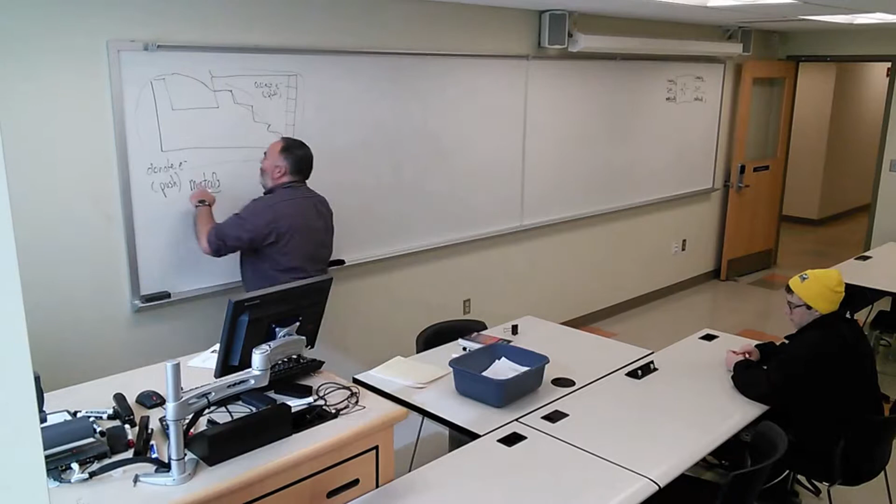That's what happens when these types of materials get an extra electron. First of all, they want to donate their electron to begin with, but when they're given an extra electron, they really want to get rid of it.

So if we take, oh gosh, what's a metal? I think it's right about there. This guy is a common one that we use. Anybody familiar with copper? Yeah, copper wire. Right next to it is zinc and nickel. I don't memorize this, I'm just reading it off the chart. Right below copper is silver, and thankfully they have their names so I don't memorize them. And then gold underneath that.

Those are all metals, and you can make wires out of those things. The way it works is when you have a copper atom next to a copper atom, they don't fall apart. Copper doesn't just shatter into thousands of pieces like glass.

Copper's a thing, and it stays together. The reason is it's so busy giving electrons back and forth. That exchange happens so quickly that if you took a picture of it, you'd see them sort of connected by their exchange. They're pushing, not so hard they're exploding, but it's this network of electrons happening. That's one way to envision what happens.

The way this works is if this is copper with its own electron, this copper with its own electron, and if I were to convince this electron to take this one, it would give that guy, give this guy, and pop up the other side. That's what we call conduction.

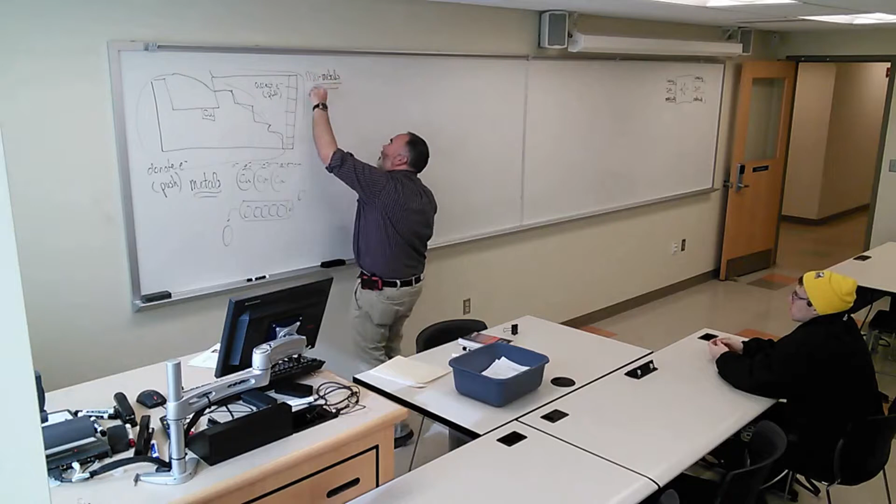These guys are metals. The ones that accept electrons - again, I wasn't around when they named these things, you'd think they'd have a cooler name - they're the ones that aren't metals. They're honestly called non-metals, I don't know why. They could have organized and gotten a better name, I'm thinking. Metals and non-metals, there's not many of them, they're just up in that corner.

One of the non-metals happens to be carbon. Carbon is a big non-metal these days. Hydrogen's goofy, hydrogen is ambivalent - it can behave as a metal or a non-metal. It can lose one electron and become a no-electron ion, or it can gain an electron and look like helium, filling its shell. So it goes either way.

But usually we have compounds of carbon and hydrogen together, called hydrocarbons. Hydrocarbons are us - those are biomolecules, I'm made out of hydrocarbons. My skin, my hair, my fur, my shirt, they're all hydrocarbons. They are non-metals, okay? Non-metals accept electrons.

So when we take two non-metals, let's say a carbon and a hydrogen, and we're going to have the hydrogen act like a non-metal this time - can you play it on again, please? There you go. You already have one electron, but you'd love to have two.

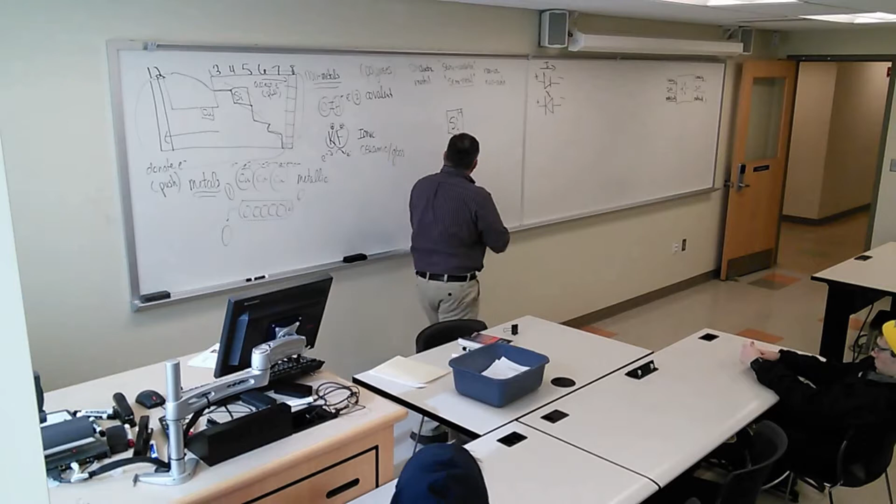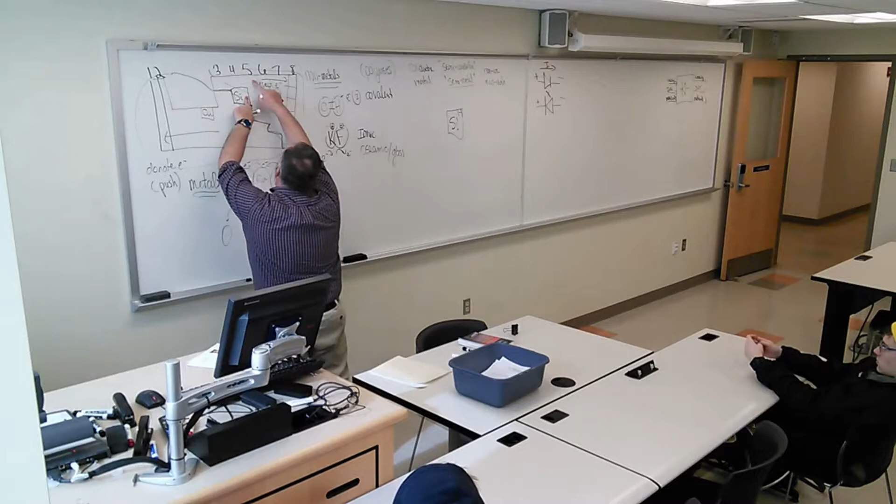So here is our silicon. Okay, silicone is different. Silicone is actually silicon, the element, behaving like a non-metal and being bonded with oxygen. It's actually a polymer, like a silicone rubber. But silicon is the element.

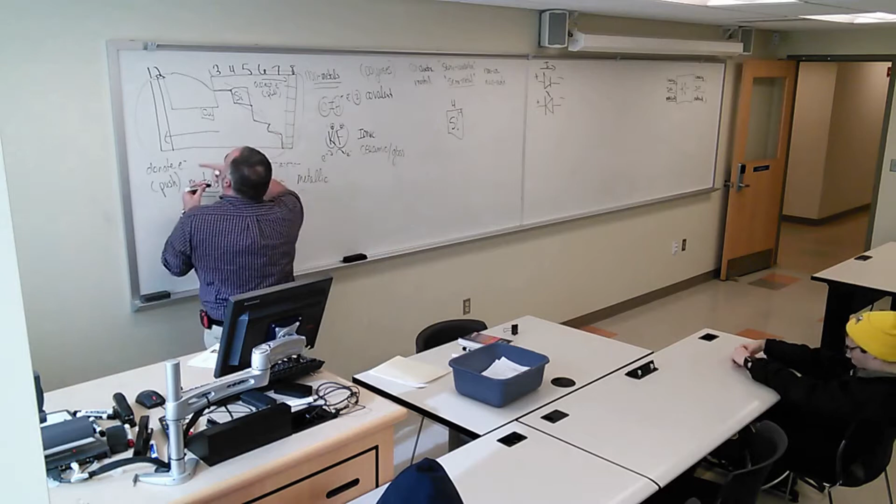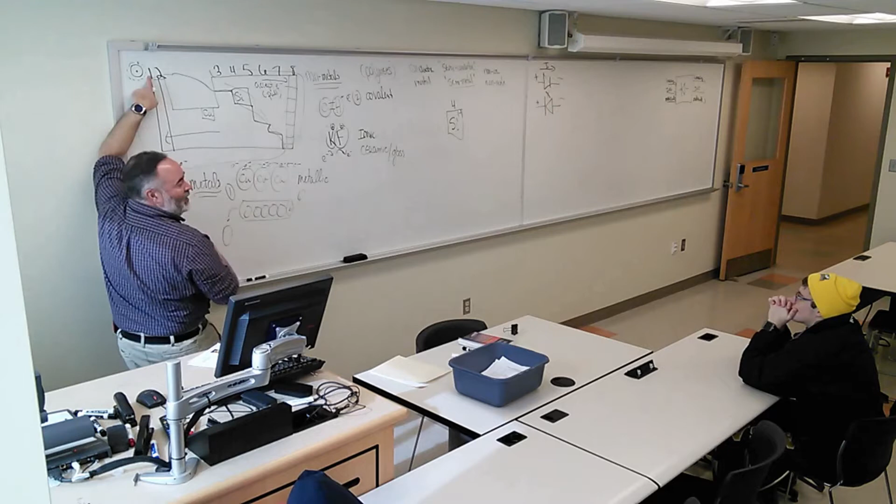We said it was element 14, but it is group 4 on the 4th column. 1, 2, 3, 4. And because we know how these things work in the periodic table, the elements over here have a full shell. This is one model. There's the nucleus, and then there's 1 electron sort of all by itself in its outer shell. That's this guy. This is 2 outer shell electrons. This is 3. This is 4. Silicon has 4 electrons in its outer shell.

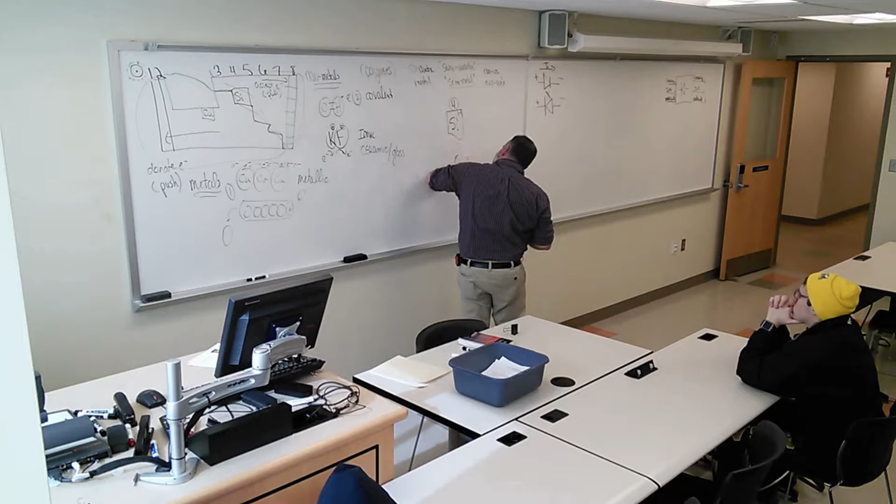Sort of like here's silicon in the nucleus, and then around here in its last shell is 1, 2, 3, 4. Okay, so I mentioned before, the scientists - this is not me making this up - said it'd be great: silicon as itself is an okay conductor. It's a semiconductor, a little bit, or not a bit.

What if we were able to give silicon an extra electron? Of course, it would make it an ion, but then it would have 5 and it would act more like a non-metal. Or what if we were able to take away an electron? Of course, it would be an ion, and only give it 3. It would be more like a metal.

So the engineers and the entrepreneurs and the designers said, hey, wait a minute. If we have an entire collection of silicon, here's silicon, 1 there, and 1 there, and 1 there. I'm going to put 5 of these guys together. Each of these guys have 4 - I'm going to use the number 4 - electrons next to them.

Instead of convincing 1 or several or all of those silicons, let's make them metal first. Instead of taking away an electron from each of them and making this thing a huge positively charged thing, what if we just replace one of these silicons with a different element that only has 3? Again, according to the electrons, it would just see 4, 4, 4. Holy crap, there's only 3 there. Okay, but we'll just change the actual material itself.

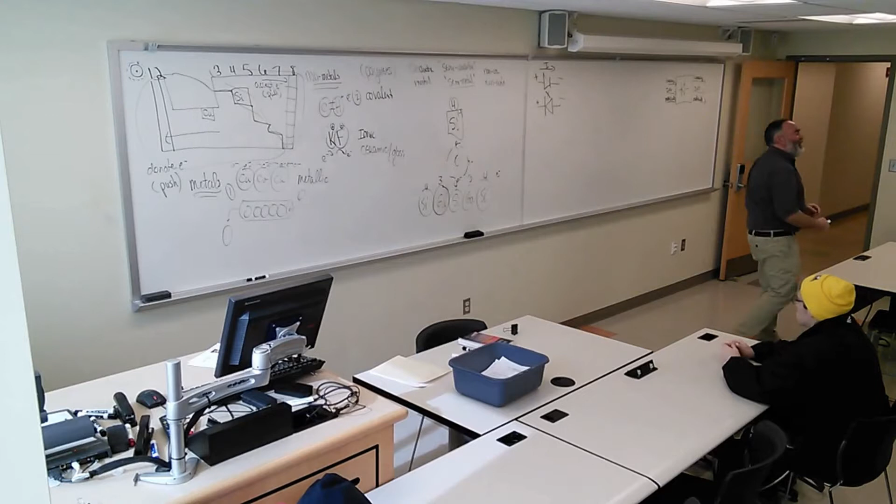But now, according to an electron that's trying to jump, there's now a space where there's a missing electron. It's only 3, so maybe there's room for an extra electron because it sort of acts like the silicon. So what we're doing is making the overall system a little more friendly to electrons, because it looks like they're missing an electron, but we're missing electrons because we've changed the atom, not by stealing one.

Because if we steal one, then it becomes ionized, and all bets are off, because then now it starts repelling back and forth. This is still neutral.

So we're going to put a small percentage of gallium, or another one, indium, in with the silicon while it's molten. Literally like making chocolate chip cookies. We're going to make it homogeneous, and then let it freeze. When we're done, we're going to get this crystal, this block of silicon gallium semiconductor.

I didn't make this up. It's called doping. There was a famous bicyclist,

Lance Armstrong. Did he get in trouble for doping? Yeah. So what do we use the word doping for? Like he took extra chemicals to make himself better? Yeah, that's where this comes from, this doping.

Again, this predates Lance Armstrong. The scientists doped the silicon with extra chemicals, with gallium, to make it more metallic, to have it have less electrons. This is gallium-doped silicon semiconductor.

Sure, that's not on the test. I'm not going to ask you this stuff. I just want you guys to realize where it's there. And we're going to constantly, through all 4 years of being an institute major, look at cool inventions and innovations like, wow, that sort of makes sense.

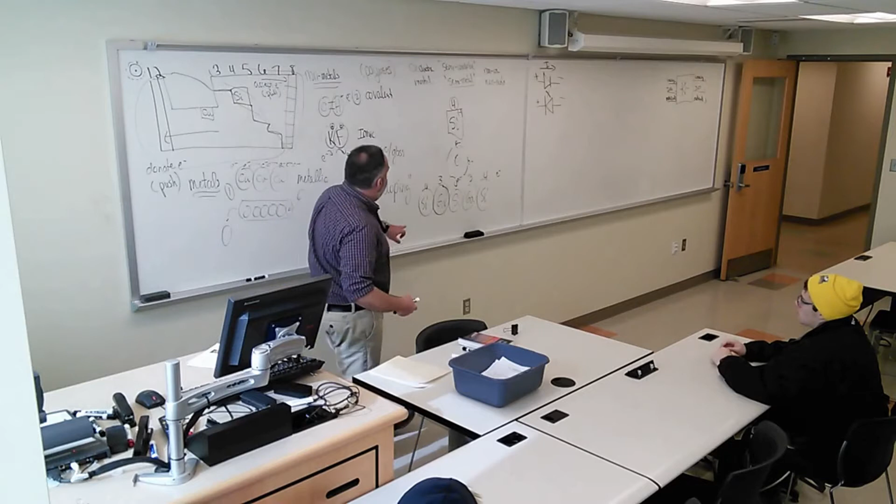And when you're done, we now have this entire industry called the semiconductor industry. That's how all of our cell phones work. Based on that: if it works for doping with gallium to make this less, then maybe it will work to dope with another material and make more electrons.

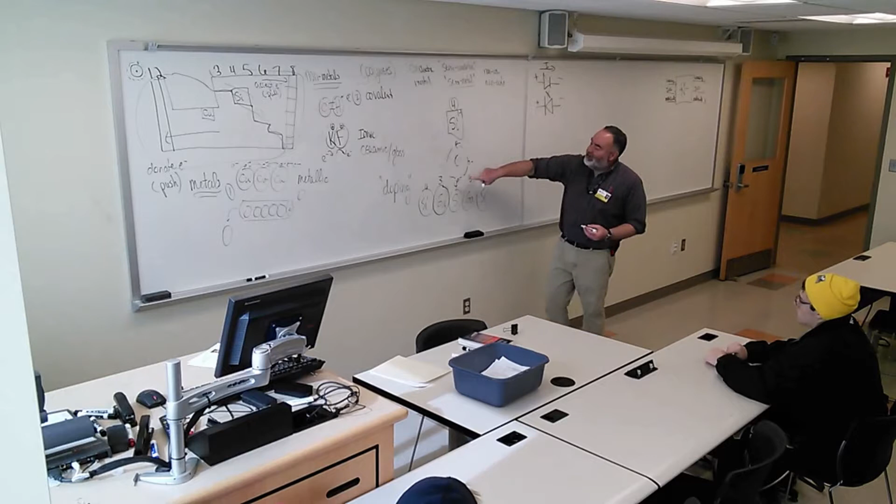Okay, so this guy's missing electrons. So if it were actually missing it, it would be positive. So they call this guy p-type, because it's positive type. It's missing electrons. It behaves more metallic, like a metal, because it's missing electrons.

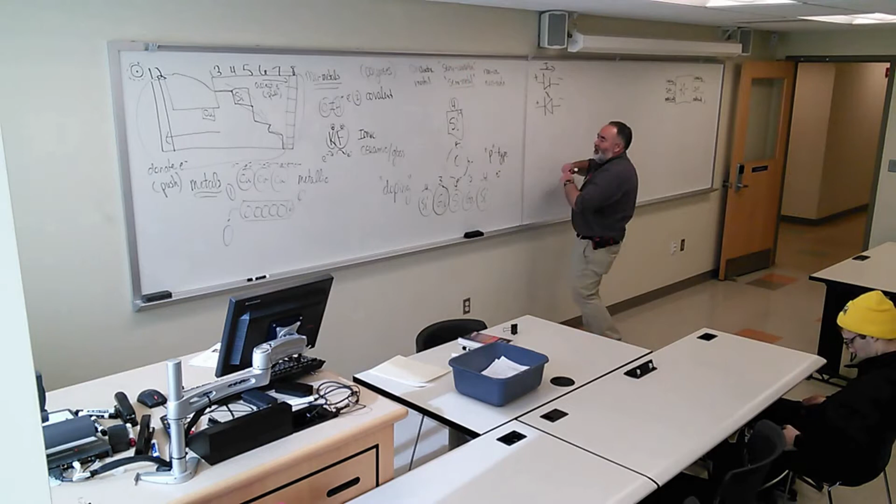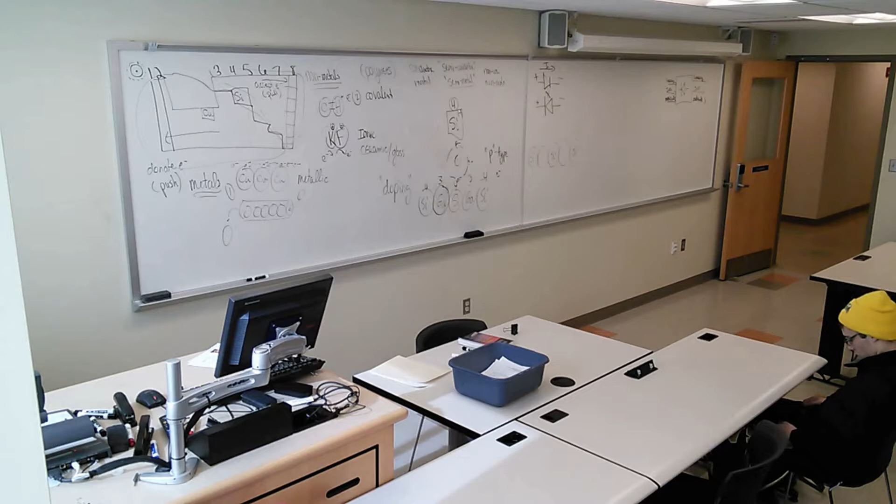We're getting back to this guy in a second. Let's do this again: silicon, missing, silicon, missing, silicon. Let's dope the silicon with a different semiconductor that has 5 electrons. Let's give it an extra electron, make it more non-metal, make it more of an insulator without actually making it an ion. So we used gallium and indium before. How about arsenic and antimony?

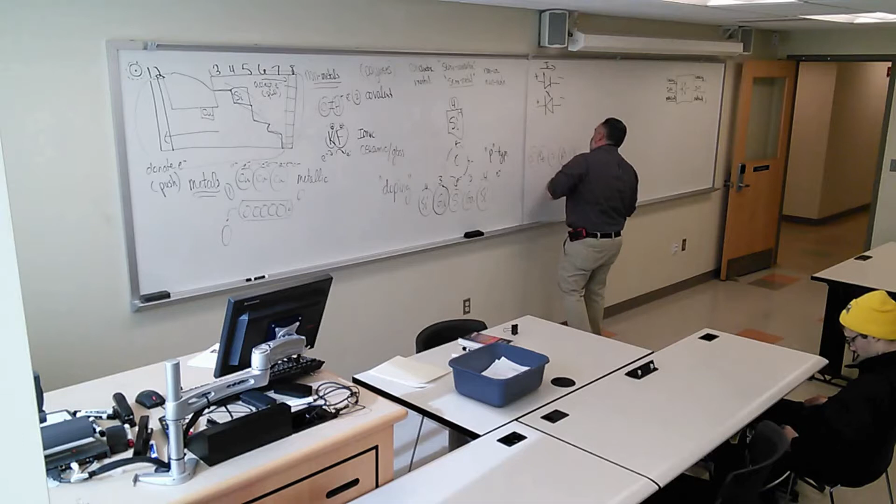As and Sb. Let's use arsenic. Arsenic's a popular semiconductor. Has anybody had arsenic for lunch recently? Anybody know a fun fact about arsenic?

It's really poisonous. Yeah, so when people hear that you're using a laptop, it really does have atoms of arsenic, and they're inside these crystals of semiconductors. Even if you lick the chips, you're not going to eat it. But if someone were to literally take arsenic, the metal, and put shavings into your lunch, Agatha Christie made millions of dollars by people getting poisoned by arsenic. It's a very popular poison. So don't do that. Don't eat arsenic.

Yeah, so now in 2016, the number one way of killing people was like stabbing them with an icicle so that it melts. That's popular. If you watch CSI, yeah, that's a popular way to go. Arsenic, for whatever, in the 40s, 50s, arsenic was the way to go. It was like the popular way to be.

Anyway, so if you're working for a semiconductor company, and this is called P-type, what are we going to call this guy? Of course we are. I can spell it. This is a 4, this is a 5, this is a 4, this is a 5, this is a 4. Now we have extra electrons. It's going to be more negative, if you will. It has extra electrons, and we're going to call it N-type.

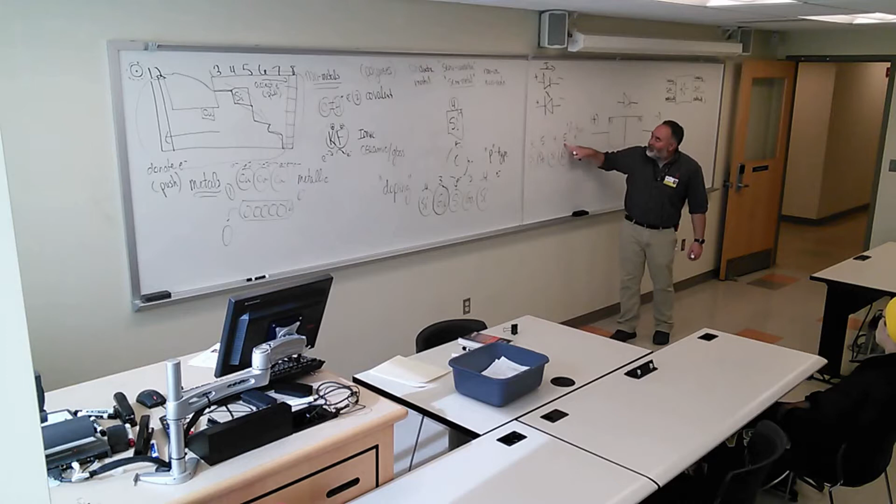Remember, the N type has extra electrons, if you will. So the way I'm going to draw this is I'm going to draw those extra electrons. I'm going to use the marker that works. I'm going to draw just the extra electrons, and not all this other jazz. You can envision in your mind's eye, there's silicons and there's arsenics, but I'm just going to draw the extra electrons, okay?

On this side, here's the P. We're missing electrons. And because I had eggs for breakfast, I'm going to draw this as an empty egg crate. There's parking spaces, there's slots full of electrons, but they're missing. But there's room for the electrons to go, okay?

So the P-type has extra places for electrons. It's missing them. They could fit some extra electrons if they had any. And over here, these guys have extra electrons. Okay? Here's our negative. Here's our positive.

I keep on mentioning and ask you guys to think about current as going from positive to negative, because it makes sense, I guess, for things to fall down. But as physicists, we know that's not true. That's a made-up story. There is no positive charge. It's not protonics. There actually is an area of research called protonics.

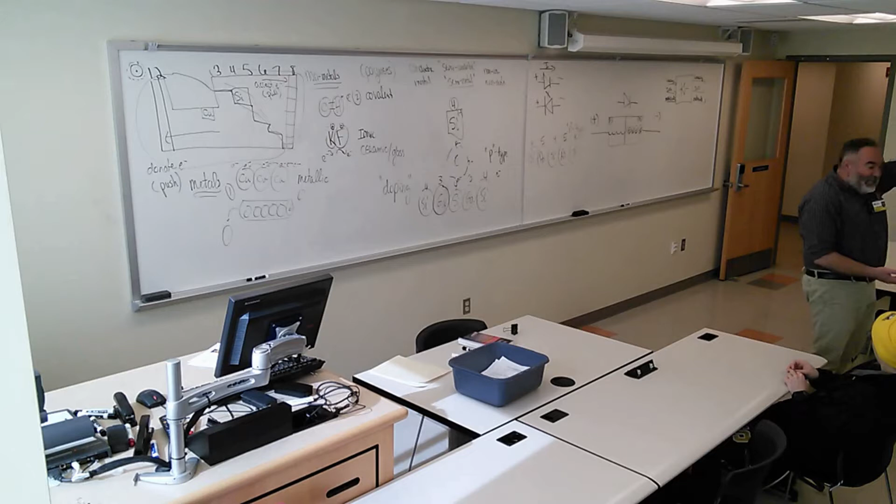We're talking about electronics. We're talking about electrons flowing. So all that stuff about current flowing from positive to negative, that's still true, but let's put that fake story on hold. Let's think about the actual electrons. This is what we're talking about, right?

The negative pole of our power supply is negative because it has a whole bunch of high pressure electrons, high voltage electrons. Positive is missing electrons. Okay, it doesn't have enough electrons, which makes it positive.

So we put this diode in the circuit. We turn it on, and all of a sudden we have this huge push of electrons. This is a cartoon. What happens? This electron gets shoved into that end of the diode, just like a wire. What happens to the rest of these electrons when we shove an extra electron in here?

Same thing with the wire. Bump, ba-dum, ba-dum, ba-dum, ba-dum. Oh, look, there's a nice space for an extra electron. And then we just keep on shoving. Dun, dun, dun, dun, dun, over to here, over to here, over to here.

After this fills up, okay, out comes like, oh, wow, fantastic. It conducts just like a wire. So this is a diode picture.

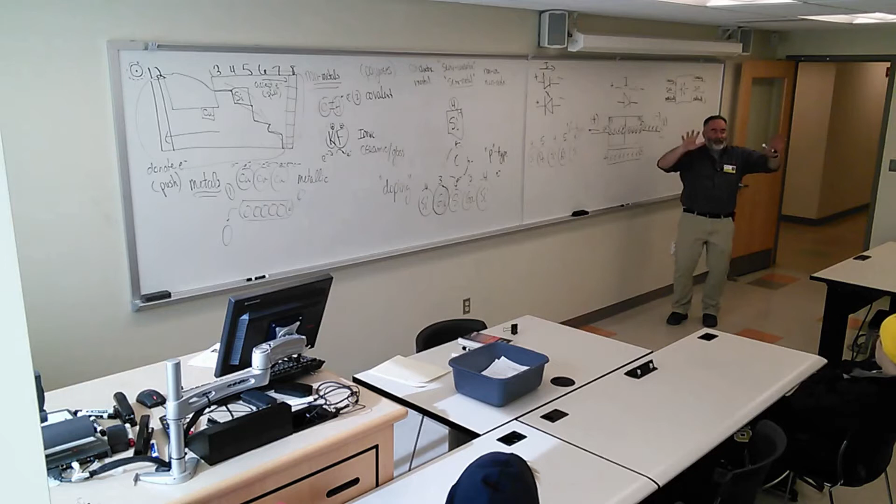So when this material is in this orientation and we turn on the voltage, there's some time. The time is almost instantaneous. The rest of the material fills up and then it flows. And then once the diode is happy, once the circuit has settled down, this just flows current all day.

From the right to the left. In this picture, we're looking at the flow of electrons, not the flow of positive current I. So even though we're sort of visualizing in our mind's eye the electrons going from negative to positive because they're falling up, this is what we mean, the current flows.

If they're flowing up, it comes back down. It's confusing as hell. I'd rather just, as a physicist, stay with electrons and say, guys, it's electronics, get over it. But everybody likes to see things fall down. Okay? So, great, what a fantastic way to think about this.

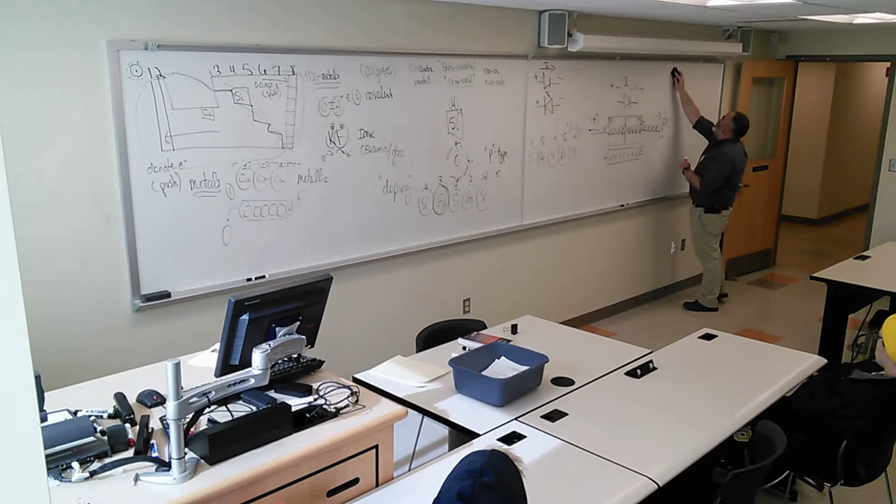What if we switch this guy around? Wouldn't work.

Diode. Let's put the P over here. Let's put the N over here. Here's negative. Here's positive. This is a push.

Oh. Bunch of electrons.

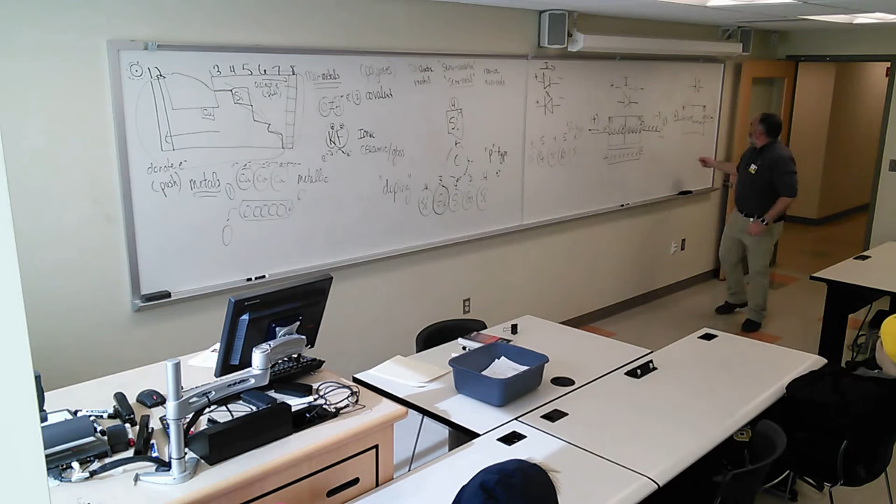We turn it on, okay? When this guy's this way, it's going backwards. When we turn it on, these electrons, yes it's true these guys, there's a parking space if you will, and there's a space over here, but this movement from there into there doesn't happen by virtue of how they've adjusted the formula. Because for this guy to jump into there, this extra parking space, this guy would have to get an extra electron. It would have to be ionized.

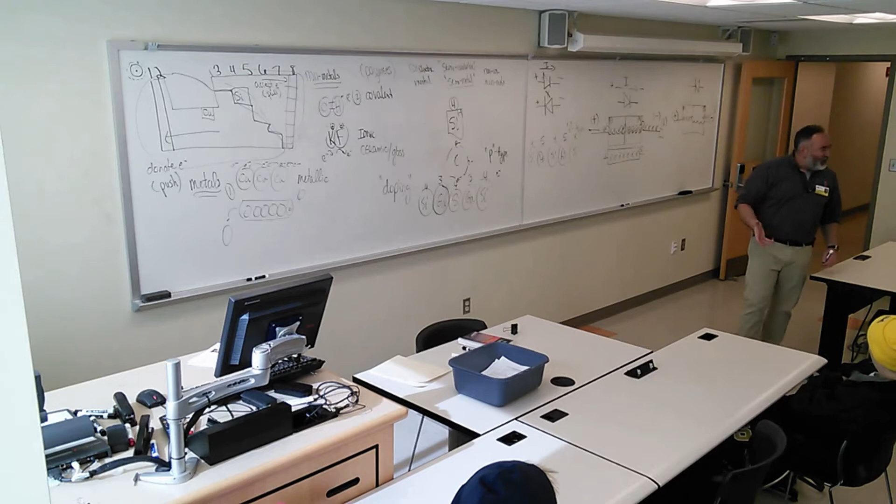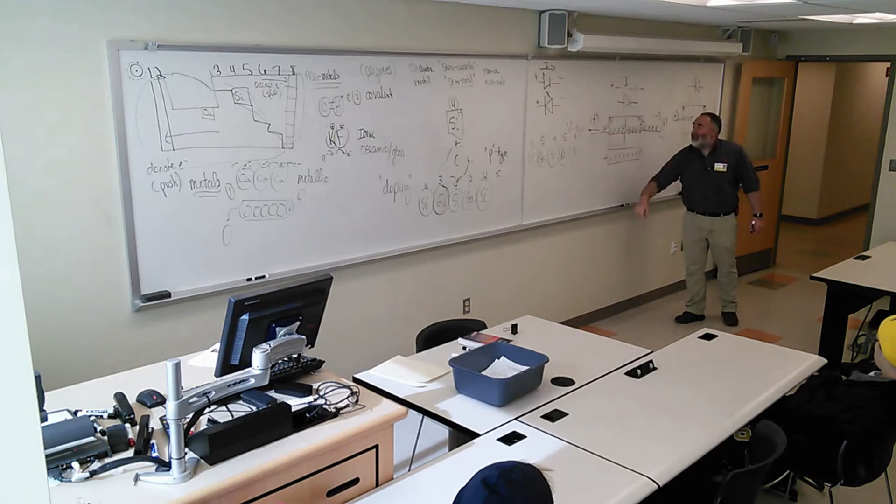We're not talking about giving it an extra negative charge, we're just talking about these guys shifting their electrons that are over here. They've adjusted it. Inside the material, this does happen where it fills the empty spaces, but this guy is designed so electrons from the outside won't fill it up. So it's as if one picture I have in my mind is this bridge, this chasm. Here's the electrons, there's nothing to get the electrons across, they're just a gap. It's as if the circuit is open, like the drawbridge and the closed drawbridge. No current flows.

Here's the current, positive, negative. Here's this guy. No current flows this way because no electrons flow that way. So the diode does not allow things to flow in this direction. You could physically pick it up and turn it around and it will flow. What normally happens inside a circuit is we change the direction of positive and negative, and when we flip the positive and negative, then it flows the opposite direction.

We have 2 more minutes. There's one more explanation. Again, this is just cartoons, so we're not solving actual physics equations and math equations.

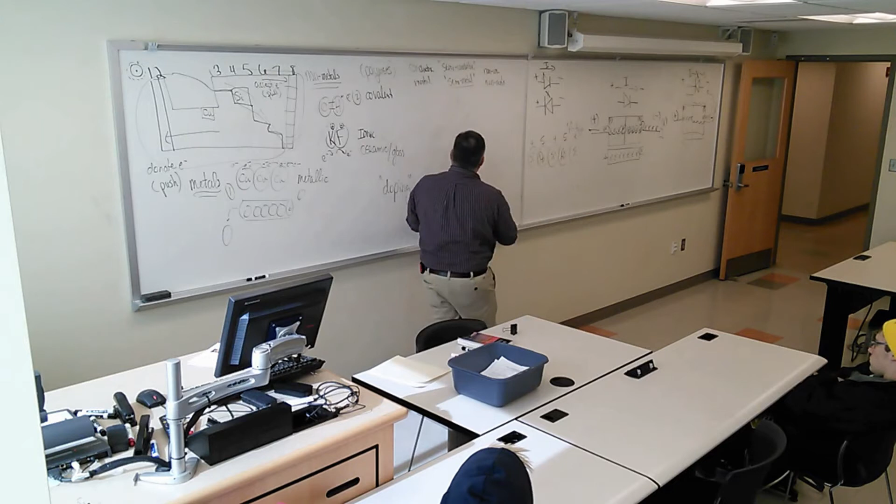Positive, negative, P, N, this guy, this guy, these extra little flaps on this diode. You guys remember what the extra little flaps on the diode meant? It's a Zener diode. Remember why a Zener diode is different than a regular diode?

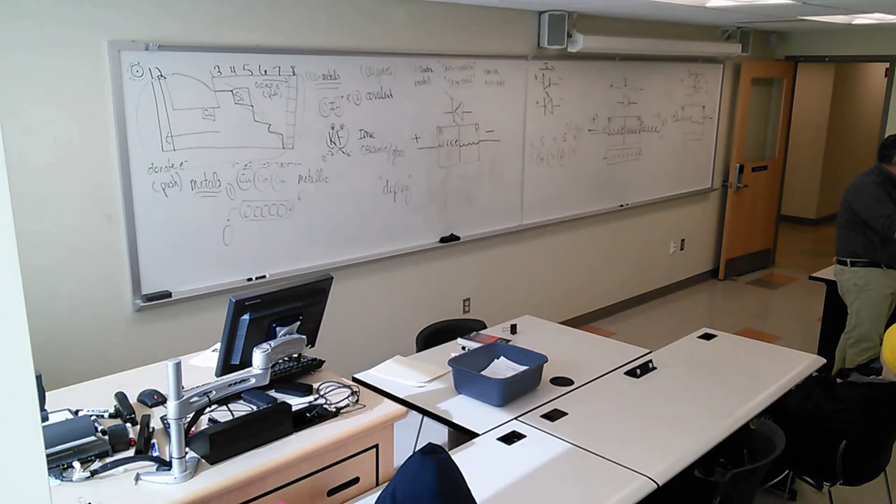What's the behavior of a Zener diode? Do you recall? We put it in backwards in the lab, and then we cranked up the push. And nothing happened, nothing happened, nothing happened. And then once we reached a certain amount of push, then something did happen. They only activate if you have a certain amount of push.

So the Zener diode, using our cartoon, is still made out of P and N, but the reason a Zener diode is made differently than a regular diode is the concentration of the N and P is different. It just so happens this is designed so that when this electron pushes in here, it will accept it, but only after you push really hard. A little push, it'll ignore it, just like a regular diode. Zener diode, if you push hard enough, then okay, I'm just filling up.

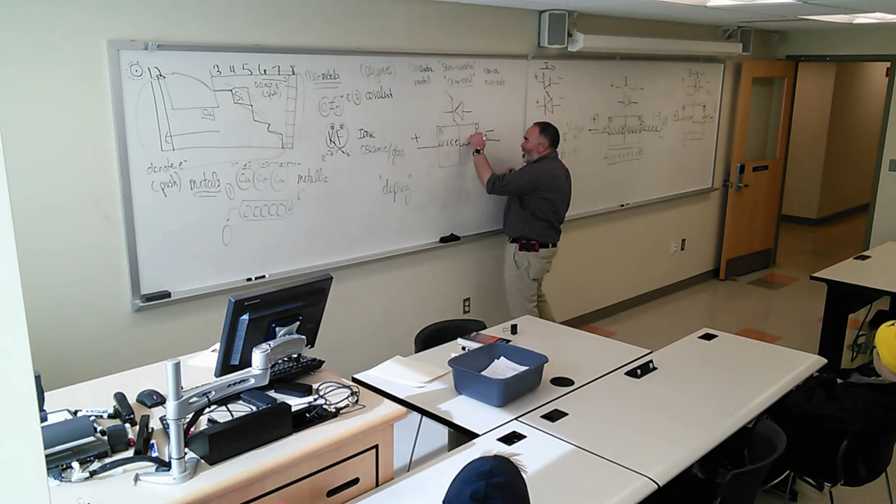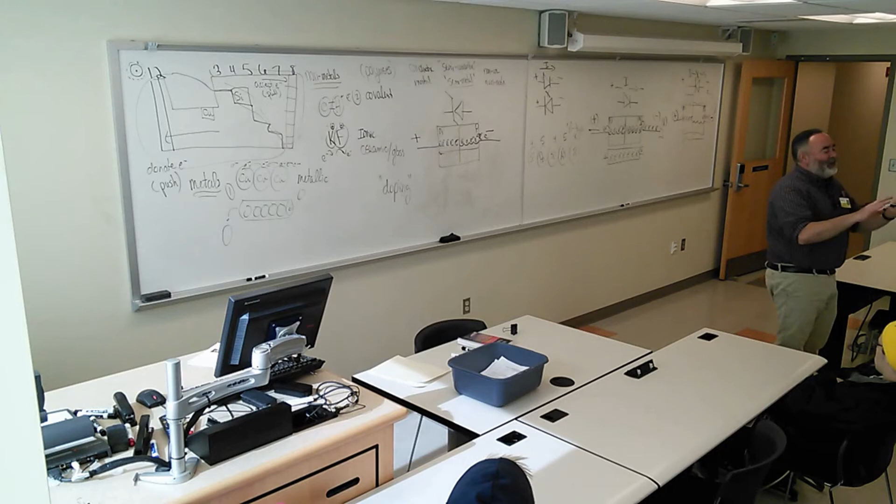I'm getting close, watch out. And then after you reach the Zener diode breakdown potential, this just turns into a wire and it opens up. So a Zener diode holds back until you push hard enough, and then once you push hard enough, things start to flow.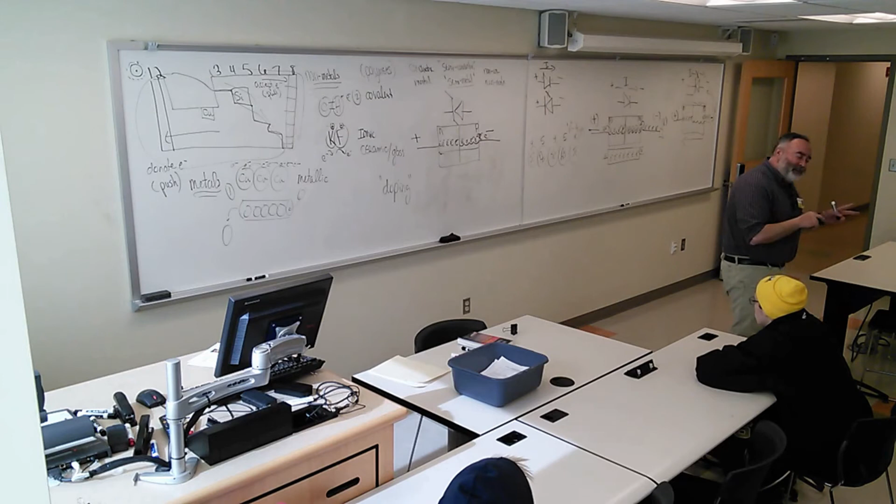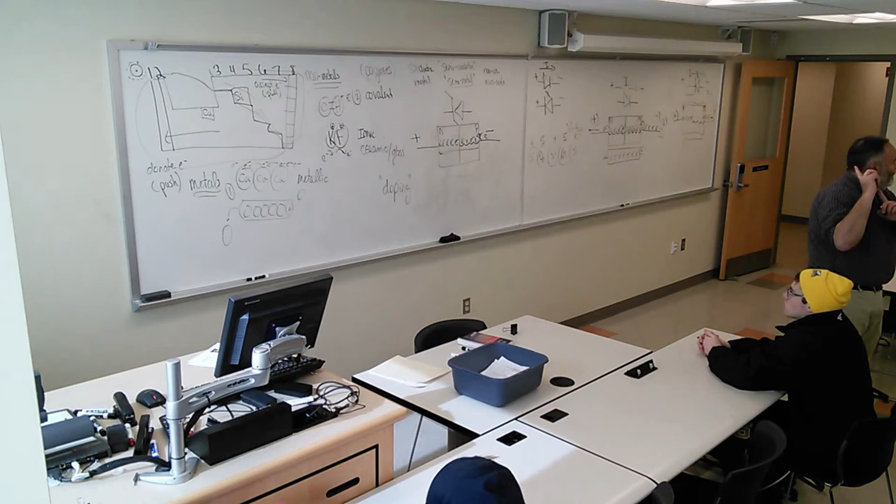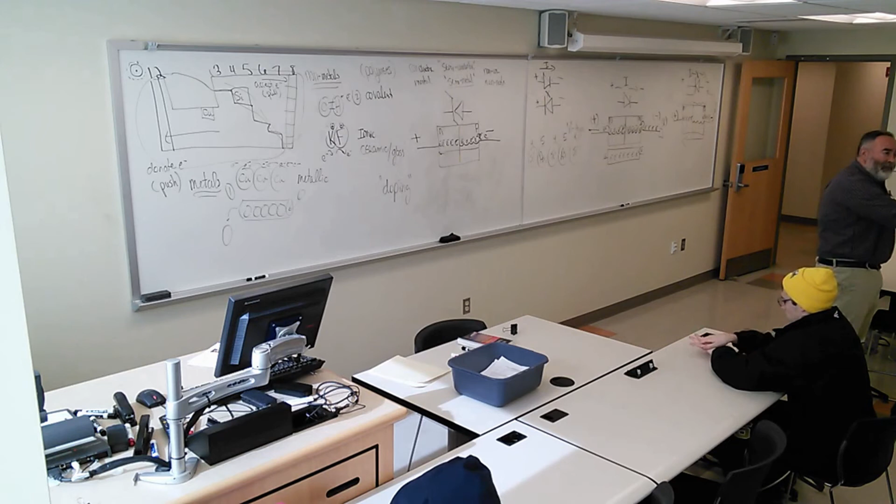Fantastic. This was not meant to be 4 years of metallurgical engineering, but it was. This is a lot of different concepts. If we wanted to do this for real and work for a semiconductor company developing Zener diodes and regular diodes, we have a lot of math behind this, but this is not fake, this is not the kindergarten version. This is our understanding as scientists of what's going on. What makes this happen in reality is real science, real engineering, real computers, and real mathematics to get the formula right, but this is exactly what's happening.

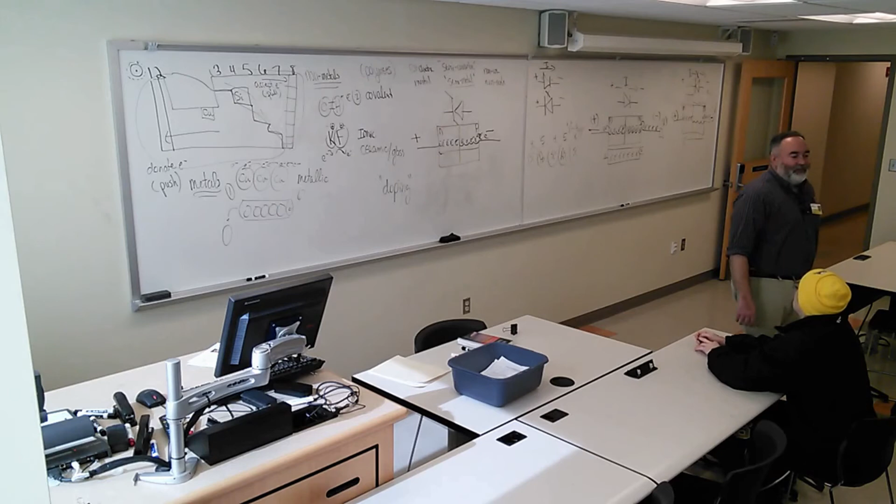We have a solid state piece of semiconductor, but if we make the recipe just right, it's actually a pretty simple little thing. And yeah, this also gets you a Nobel Prize. So had we done this in the 40s, we'd all be eligible for a Nobel Prize. By the way, it's one of those things where you didn't know before, and now you do. Like, that's easy, but no one knew before. Which is kind of cool.